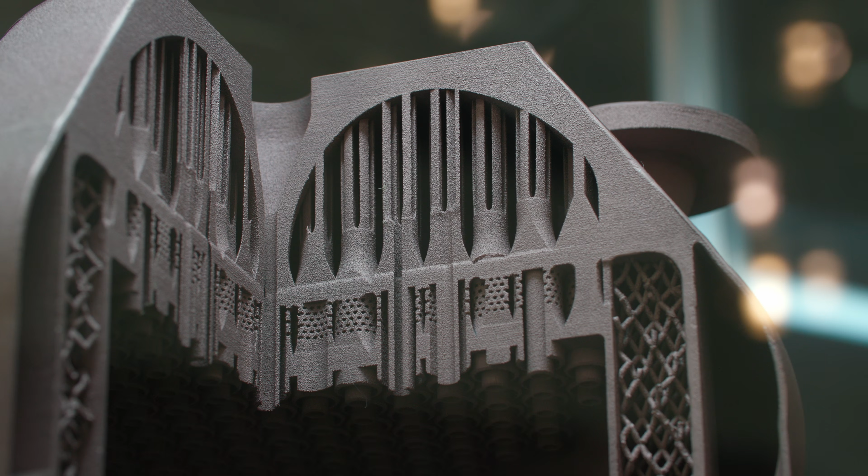What's the value proposition of Sintavia? Well, we are a Tier 1 thermodynamic designer and manufacturer supporting companies like Lockheed Martin, Northrop Grumman, and others with additively designed and manufactured heat exchangers, where you have a hot fluid flowing next to a cold fluid in a very tight, compressed boundary condition. Our heat exchangers perform better, are less expensive, and are delivered more timely.

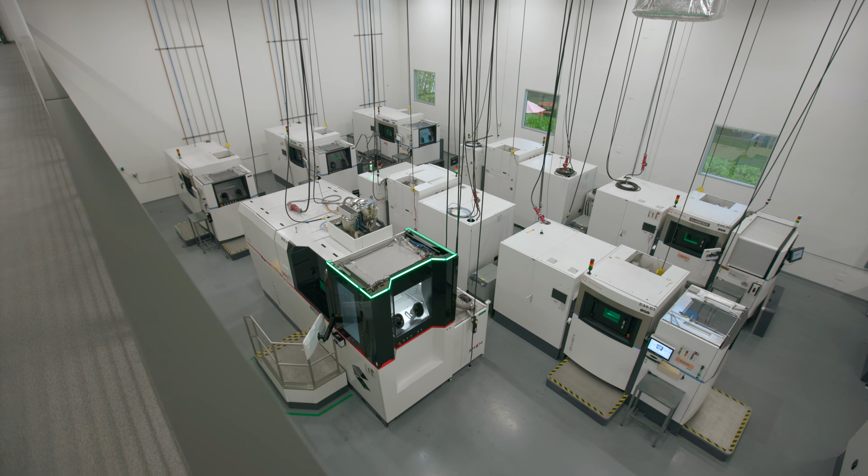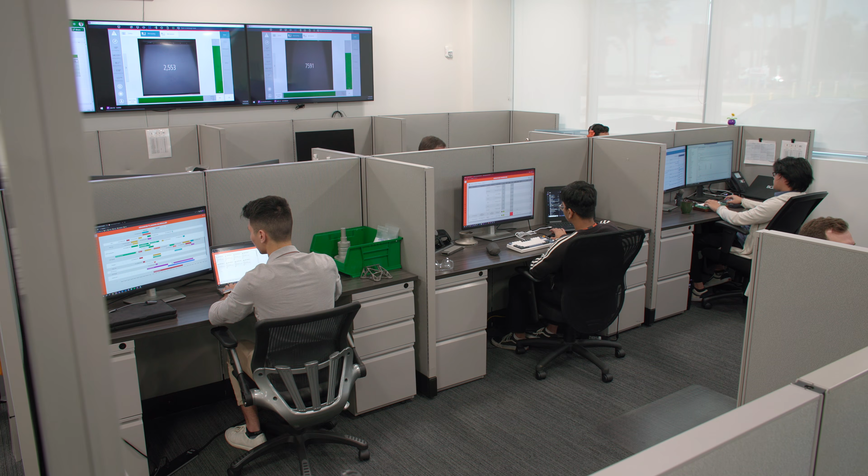Shortly after we were founded, I recognized that we needed to be totally vertically aligned. We had to build a factory that had all of the pre-processing, printing, post-processing, quality, and inspection under one roof. And when you look at our approach to software, we want to have that same vertical alignment. We want to rely on one suite of products. Siemens offered us the best end-to-end package.

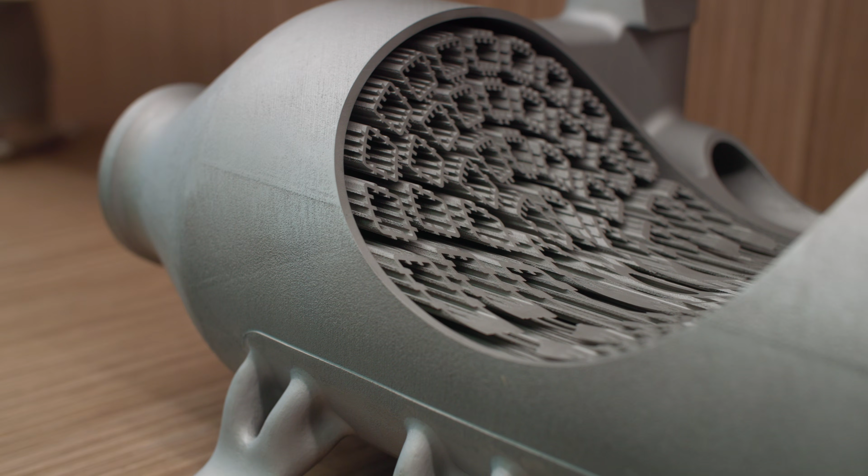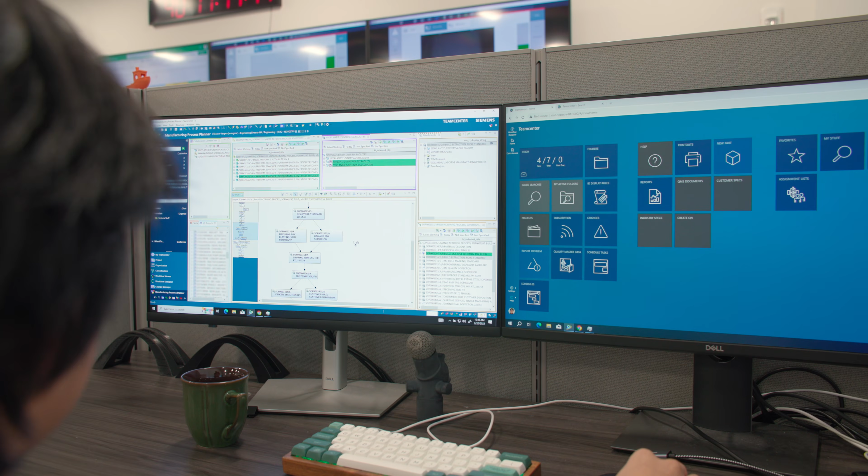And since that time, we've expanded it on both ends. We've really started focusing on incorporating the embodied design of the heat exchanger into the files that we're manufacturing. And for that, we've had to use STAR-CCM+ and Simcenter, and you start simulating how a fluid would work in a given system. We were focused initially on using the NX suite and have since added on Teamcenter and Opcenter. Teamcenter locked down all of our data, all of our processes, and that was big because that's very auditable. It's sort of the lingua franca of the aerospace industry. And then we started implementing Opcenter.

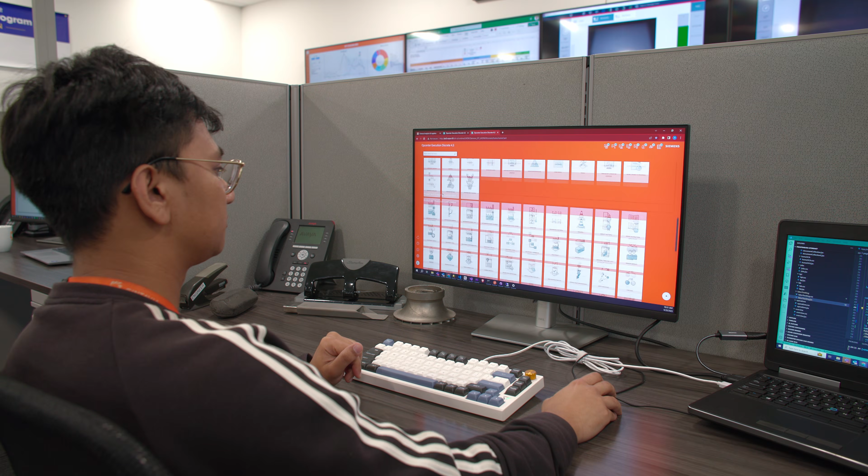In 2019, we had a handful of engineers working on 10 to 20 projects. Today we have 40 engineers working on 60 projects.

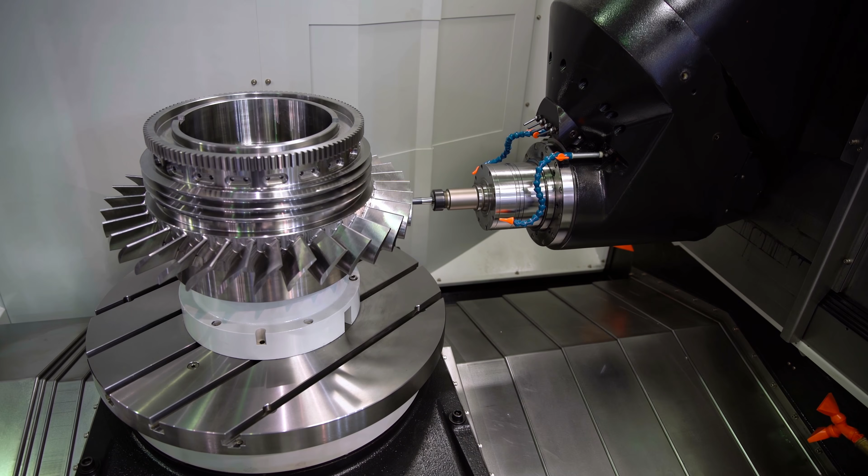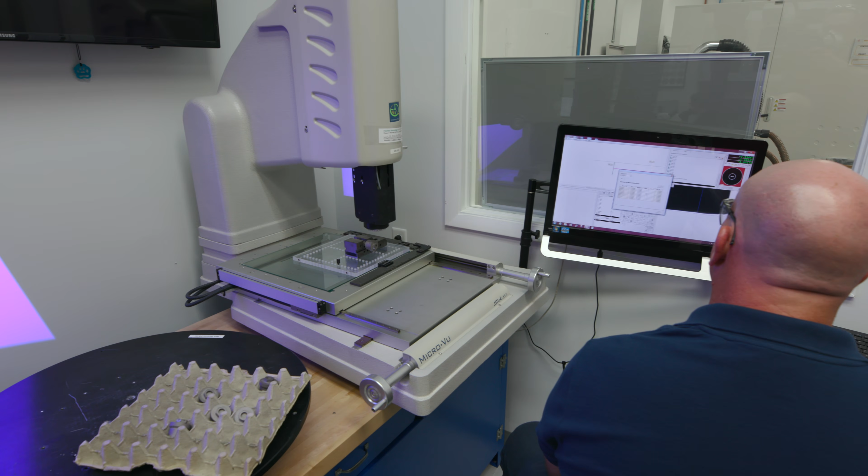Additive is very difficult. Traditionally in a machine shop, you take a block of material, you machine it, and you inspect it. We have that plus casting, plus all the metallurgical and witness samples that have to be tested, plus inspection. Traceability becomes very difficult to manage.

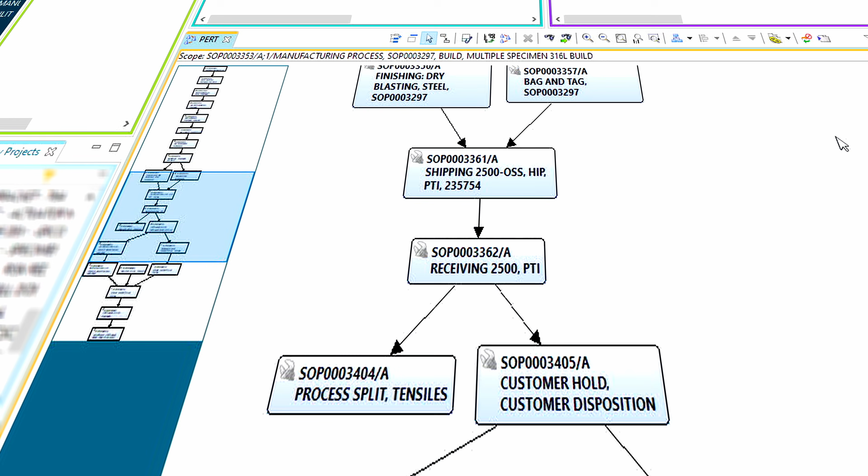Opcenter jives nicely with Teamcenter, where we're able to create our manufacturing processes and then execute them out on the shop floor. The hardest thing to change in a company is culture, and this requires a culture change.

People need to be responsible for signing into operations in order for the MES to track and provide good information and data. So all credit here goes to the digital manufacturing team. These are a great group of people who are really passionate about their work.

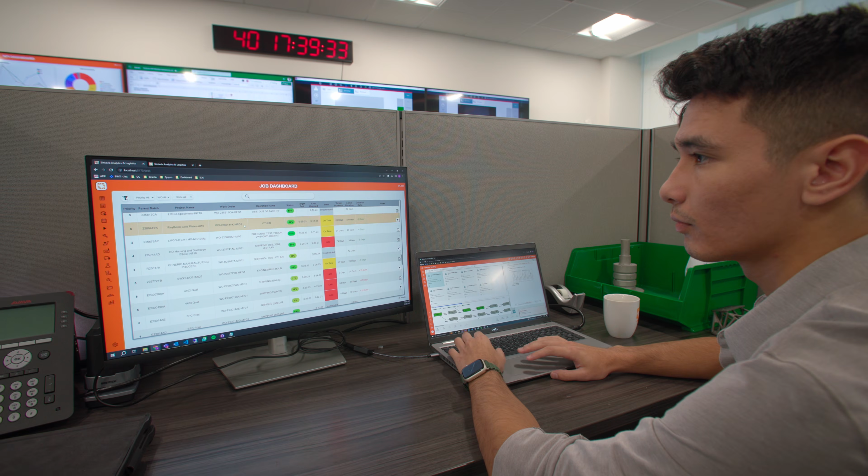I'm always fascinated with difficult problems, and MES is probably one of the most difficult problems in a manufacturing facility. Previously, we were using a bunch of decentralized Excel sheets to track everything, and that can only get you so far. One of the things that Opcenter provides to us is structure and ease of information. It's all centralized in one location, and everybody could look at the data at any time they want.

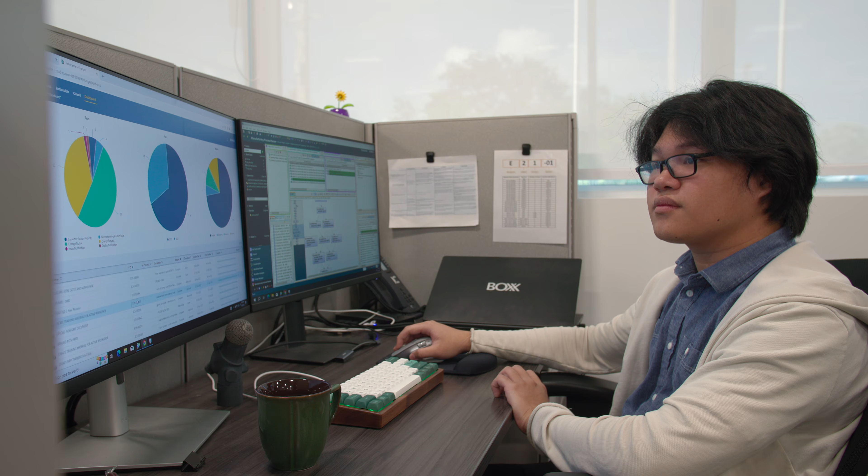My main role is the Teamcenter administrator. So it all started out with just digitizing our Word documents, storing it in the Teamcenter. So all our contract reviews, our routers, POs, quotes, that type of stuff. And that grew into workflows, reviews. Then we hit, hey, we're gonna digitize our router into a manufacturing process planner.

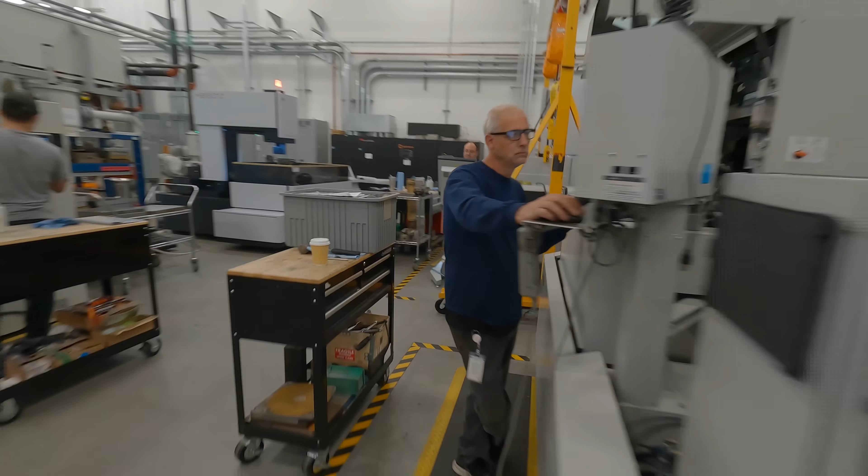The main thing we've been working on is customizing our system to be a lot more user-friendly while still maintaining robust traceability. I started as an intern and I was automating some of our AM processes already. So Jeremy brought me along to help with this MES system.

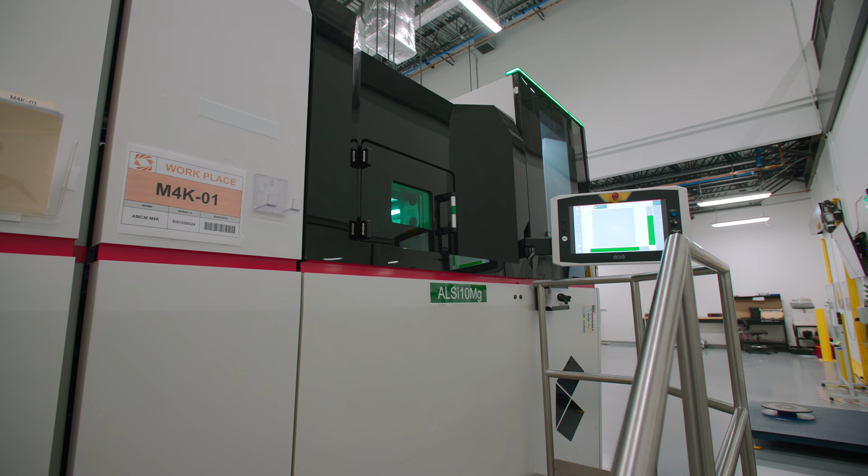Working with Opcenter, once we figure out how each piece of the puzzle fits together, we can improve efficiencies by like tenfold. One of the best parts about Opcenter is that it really tracks even the minutest of details. We present them to our stakeholders saying, hey, we never had this before, all these data metrics, what can you get from this? Opcenter has really standardized our AM process. There's still a lot to do, but I feel like we've come a long way from where we started.

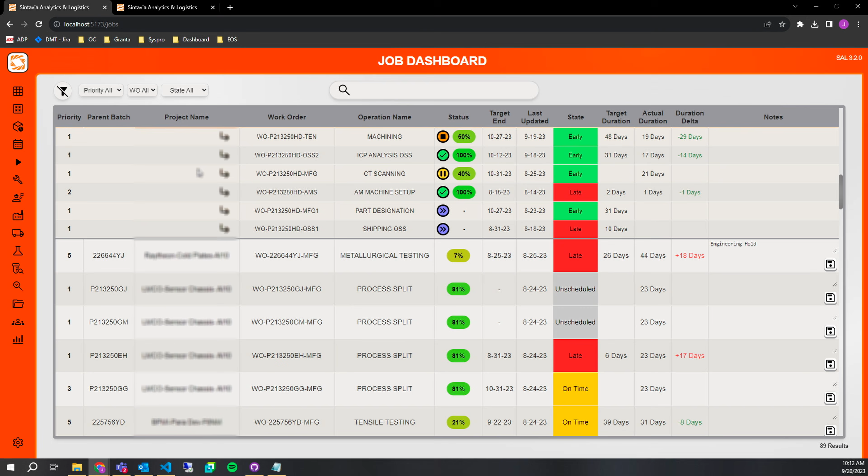Having Opcenter and Teamcenter snap together makes working with these software systems a lot easier. So we created from scratch a dashboard or a control center. Every morning we meet downstairs and we do a health or state of the different projects throughout the facility. We're able to easily project all of the projects that come along, determine whether or not they're late or on time, and raise those red flags.

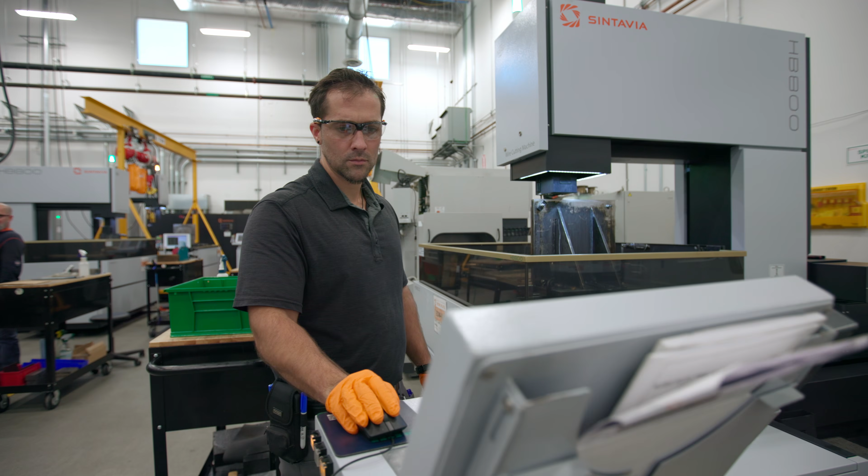What the DMT team has accomplished is beyond just a dashboard. This software not only gathers data, but it organizes it, displays it, and it controls our manufacturing. It gives any area of our business a live view of what's going on.

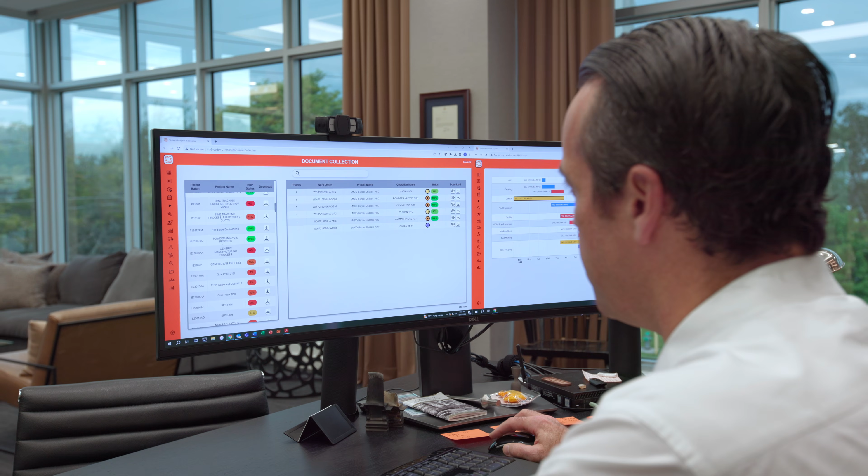The work we've done on both Teamcenter and Opcenter will allow us to at least quintuple our revenue very, very easily without any additional investment. It gives us the foundation to grow and grow rapidly and not get lost in the weeds.

In my mind, form follows function. Software should make the function of what you're doing better and faster and more complete with less errors. And that's what the Siemens suite of software does for us. Siemens software runs our business.